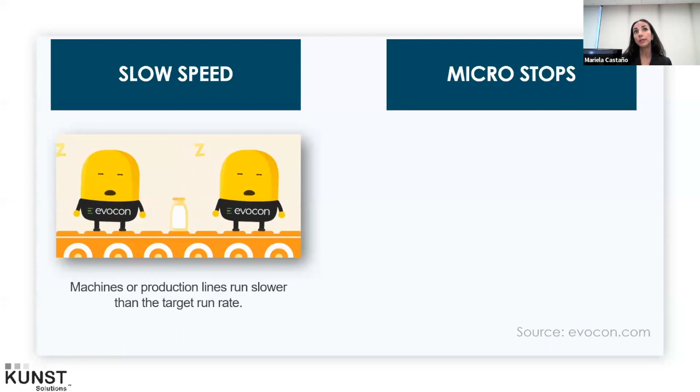When we look at slow speed, we see that the machines or the production lines are running slower than the target run rate. So yes, once we design a process and our engineering team defines this is the run rate at which the equipment should be running, sometimes we see that we are running lower than that, slower than that. And sometimes we opt that that is acceptable because of the constraints that we have with either the variability in the equipment, the variability in the labor, the materials, or so on, or simply because we don't have the demand and we agree that we are going to run our lines at a lower speed.

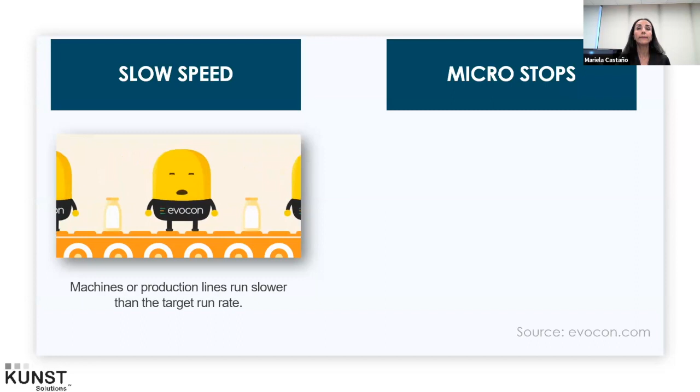However, when we look at the micro stops, micro stops relate to machines or production lines that stop briefly and frequently. And this is where things get complicated, because often we are too busy running around our plants. We don't stop and we don't see that these stoppages are happening. They are so brief that within a blink, you don't realize that they are happening.

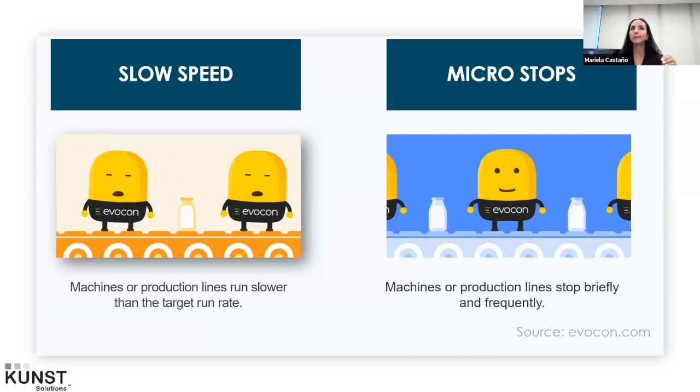But in high speed lines, when we're talking about production lines that are processing products at 1,000, 2,000 units a minute, well, these micro stoppages count. So they often go unnoticed. And today, I want you to start noticing them. And why do I think it is important for you to notice them? Well, because they cost money. They cost a lot of money.

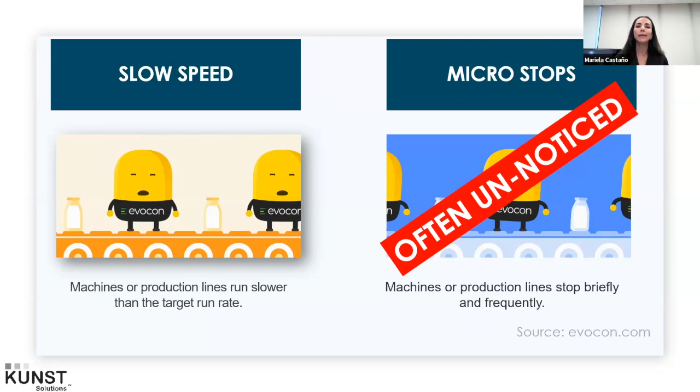And I'm sure that you're saying, yes, of course, I know, that is obvious. But when you start looking at cost and that dollar figure from a different perspective, maybe you're going to get more motivated to look at the micro stoppages differently and to start acting on them. What do I mean by that? Well, there is significant overall downtime. So imagine if there is a micro stoppage that only takes a few seconds, but you run hours, days, and years of production, those seconds become minutes, hours, and days of downtime.

Often when a machine goes down, all maintenance, hands-on team members, everyone is like, oh my God, we have to deal with this. But we don't do the same when there are micro stoppages. We just walk by them. We just unjam the line. We just figure, well, it's normal. That's how the line runs. And I'm going to tell you, it's not. When you start calculating the amount of time that it takes, it becomes a big, big number in your overall downtime.

The second aspect is that it increases operational inefficiencies. So we often just troubleshoot, and that troubleshooting becomes rework, and that rework then turns into poor quality. Well, I can tell you, we have identified that around 60% of operational inefficiencies are due to micro stoppages. And then how about productivity? Well, productivity gets reduced dramatically. Lower or constrained capacity equals lower profits. And we have seen time and again, when we quantify the micro stoppages, that productivity in many organizations gets affected up to 80%. That is huge. It's huge.

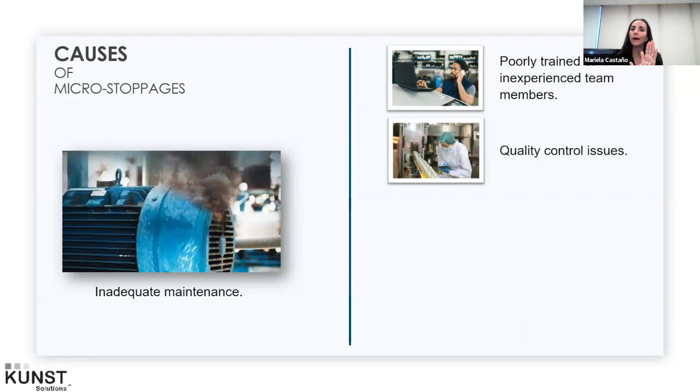The next one is quality control issues, and quality is a significant aspect within the food industry. We know that we're trying to prevent recalls. Food safety is number one in our action item list, but very often we use those controls to monitor micro stoppages. Very often those quality controls create micro stoppages because quality imposes a check and very often works with engineering, works with maintenance to figure out how that check can happen without having to stop the equipment, how that check can happen without causing an upset on the equipment.

The next one is inefficient changeover processes. It's very, very sad to see that even though within the food industry we go through hundreds and thousands of changeovers day over day, we don't seem to be very efficient always at them. And it's our livelihood. Come on, it takes capacity, right? But we're not so efficient at that.

And another one that is a big one is the lack of standard operating procedures. For some reason, we still believe that tribal knowledge is the way to run the business, and it's not. There is a huge, huge amount of knowledge in our team members' brains, in our leaders', team leads' brains, that doesn't make it to a standard operating procedure. So everyone has a different way to run the business, a different way to run the operation, a different way to set up the machine. That variability increases the amount of micro stoppages that happen.

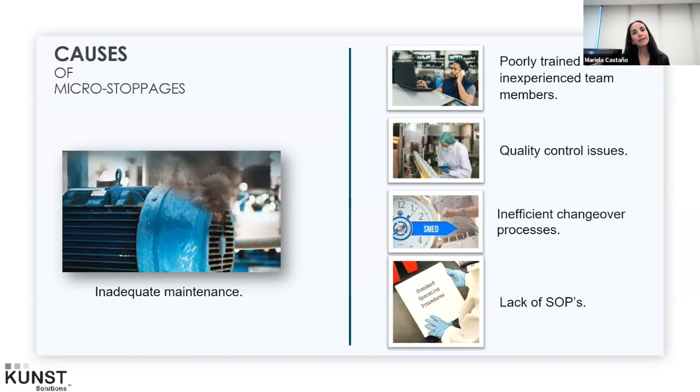So there is another one, a big one out there, big cost, and that one is poorly engineered processes. And I'm not ashamed to say that. I am an industrial engineer myself. I design processes, and the processes make sense to me, in my mind, in my computer models. But once those processes are implemented, they might not make so much sense to the operators that are running the equipment or to the maintenance teams that are in charge of making sure the equipment is up and running at all times. And how do we know that we have poorly engineered processes?

Well, because we experience jams, lots of jams, guys. So if you walk through your plant and you see that those bottles are not moving, that conveyors are stuck, that air conveyors are stuck, bottles are dangling, packages are falling off the conveyor, that is because we have jams, meaning we didn't design, we didn't engineer our process properly. Our equipment has an opportunity to be revisited, to be re-engineered. So knowing the causes for the micro stoppages is good. Now, what do we do?

Well, guys, we have to reduce it. And for that, there is a strategy. Very simple, and that's what I'm going to share next. So the strategy starts by using data to approach the understanding of the micro stoppages and to address the micro stoppages. So we said, well, stories take us a long way. We are very emotional about how we run our business. But when it's about micro stoppages, only data. You need to use data to drive your decision making.

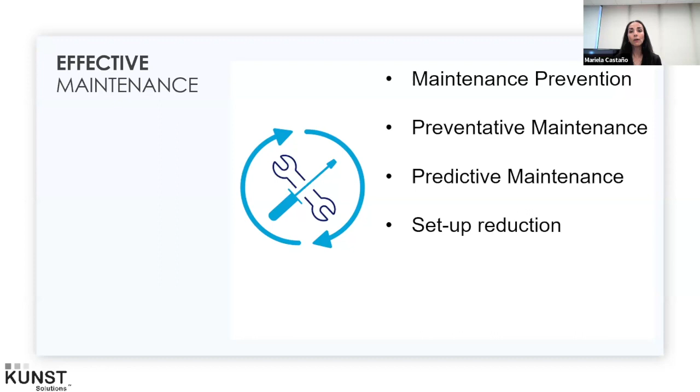And then we are looking at setup reduction, which we just mentioned, is reducing the equipment downtime from the last good part to the next good part that we're running. And how about spares control? It's amazing how many millions of dollars organizations spend on spare parts, and often they are not the right ones. Often the team members are using the wrong ones, or often they get damaged during installation. So making spare control more holistic will help you with the reduction of micro stoppages.

And now, AI. No more or no less than using AI to detect abnormalities, patterns, and trends to understand the equipment behavior. Yes, that's what AI is going to do for you. It's going to allow you to understand how the equipment behaves, define those patterns so you can create that scope of work.

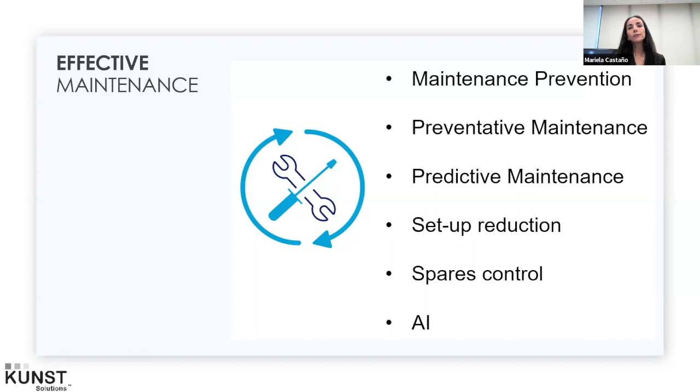Now, focused training. And when we look at focused training, then what we want to do is the obvious: ensure that our team members know how to deal with the equipment, how to use it, and how to troubleshoot. Many of you do it, and good for you. Keep doing it.

Identifying and addressing the micro stoppages promptly. That's a little bit harder. So we need to teach them the root of the micro stoppages so they know how to address it. We need to provide them the right tools. We need to create escalation protocols so they know if my micro stoppage is going over this amount of minutes, this is what I need to do.

And now the most important one is stopping the line. We need to give empowerment to our team members to stop the line. They identify micro stoppages too often, too many of them, stop, so we can figure out what's wrong, we can address it.

And my most favorite one, zero adjustments and center lining. Most organizations suffer from adjustitis. Our team members start their shift and they go and adjust the machine. They go to break, someone comes to relieve them, and what do they do? They adjust the machine again. And then the next person comes back from break, and what are they doing? Readjusting the machine. They're moving the center line further and further every time, causing micro stoppages.

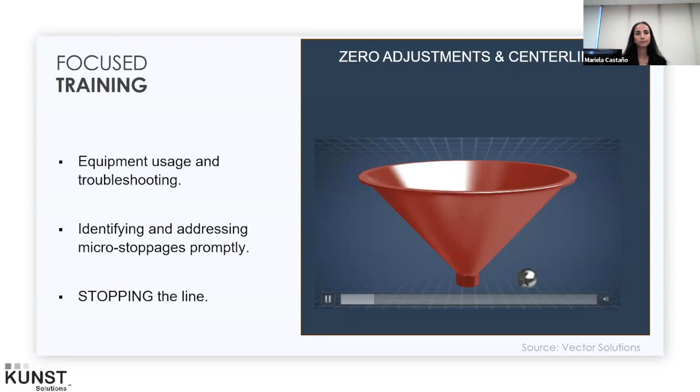And for that, I'm going to prove to you that there is a way to deal with it. So how do we deal with it? A thought experiment popularized by Dr. W. Edwards Deming, called the Nelson funnel, demonstrates the importance of not making adjustments to an in-control process. In the experiment, a funnel is positioned a few inches above a flat surface. There is a target directly under the funnel.

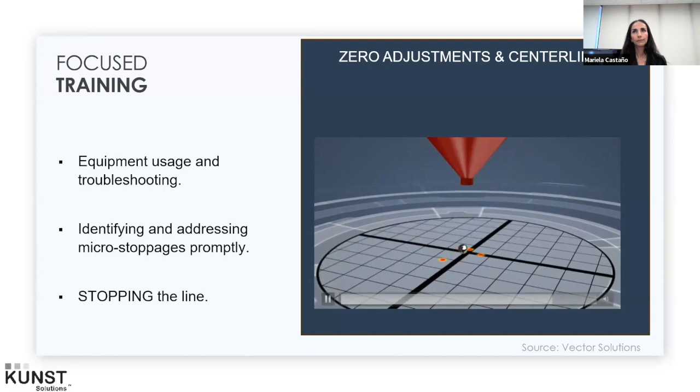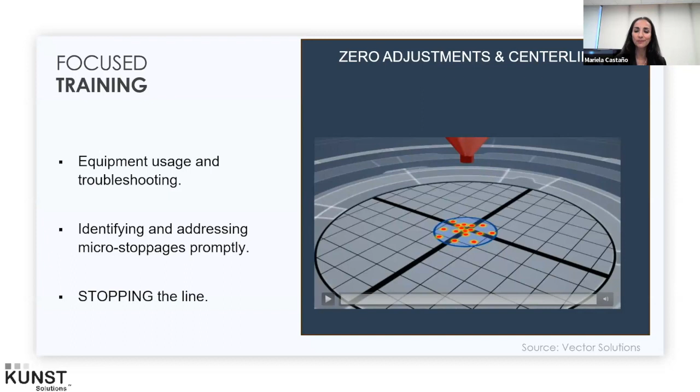100 marbles are dropped through the funnel to try to get as many marbles as possible on or near the target. When a marble is dropped through the funnel and lands on the surface, it will always roll an unknown distance in a random direction. If we leave the funnel completely still and don't adjust it at all, the resulting marble locations will be pretty widely distributed in a rough circle around the target. You see? As simple as that. Stop making adjustments and you're going to reduce micro stoppages. There is the reasoning behind it.

Well, and we cannot forget optimized quality control. And what do we mean by that? Having a robust quality control measurement system and to ensure that we can reduce repeated checks. You know, sometimes those checks are not needed. Let's evaluate what we really need and how we can perform the best with the resources that we have without increasing the stoppages on the equipment.

But also automating inspection systems. Guys, again, you spend millions of dollars on equipment. Let's use the technology that is out there to allow us to minimize manual interventions.

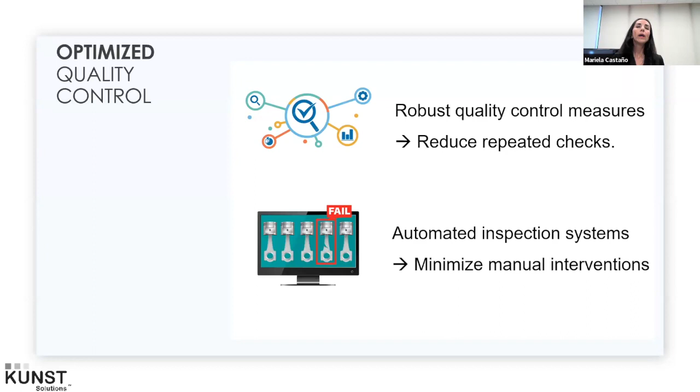That loss is significant. People only look at the losses when the machine is down. They don't realize the losses when the ramp down is happening and when the ramp up is happening. They can be even bigger than the losses when the machine is down. So my message to you is reduce the downtime during the transitions. Ensure that there is a smooth changeover.